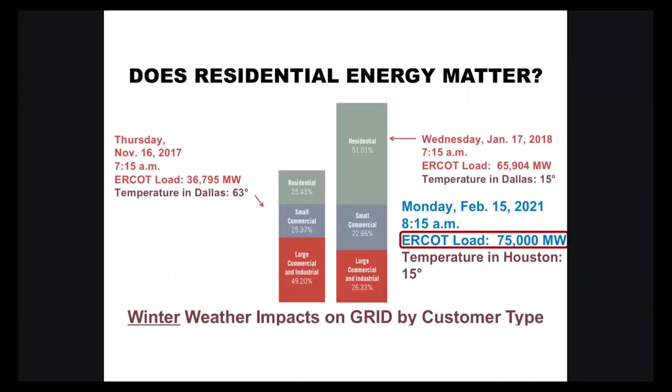And you can see that residential just goes crazy. Everybody's firing up their heater and doing everything they can. Large commercial goes down in percentage, so does small commercial. They go down in the percentage of energy being used, and residential is just completely going haywire. Okay, so that's winter. And then, did I miss summer? What the heck? Okay, well, anyway, summer is very similar.

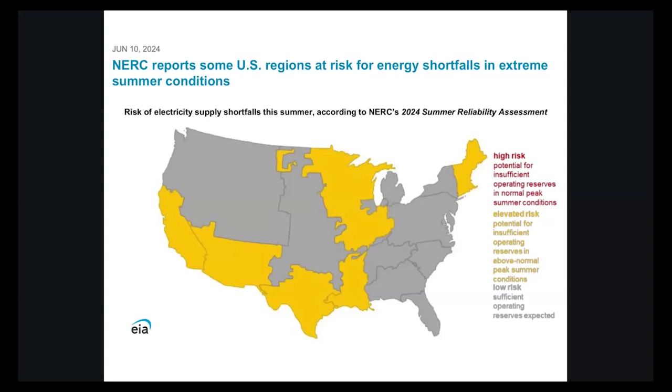So then this is lately, the high risk and elevated risk potential for insufficient operating reserves in above normal peak summer conditions. Okay, and so you can see that we're right in there compared to the rest of the country. Nor are we alone. But we're in elevated risk for this.

And then this was a New York Times article. I loved it, and I've been incorporating it for a while now. This is the 90s and into the 2000s average of days above 100 degrees. Okay, and you can see that Houston is in the gray zone, and we should realize that we had 2011, which is right after this was done.

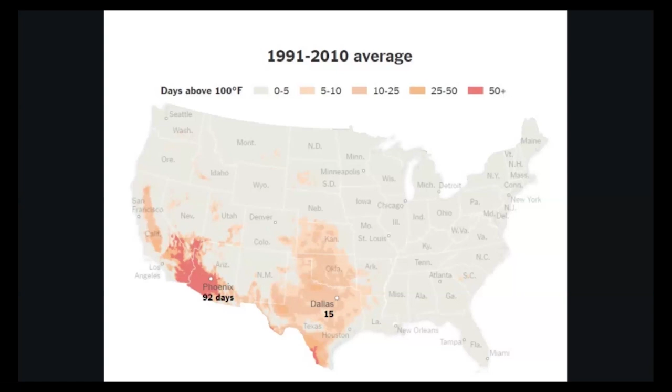All right. So there's all kinds of stuff on the internet. I just found this residential energy consumption survey. So here we are looking at air conditioning expenditures per household. And you can see that the Texas average, top right next to the map, is 460 compared to 299 for the average in the United States. And of course, you've got Alaska contributing to the average in the United States.

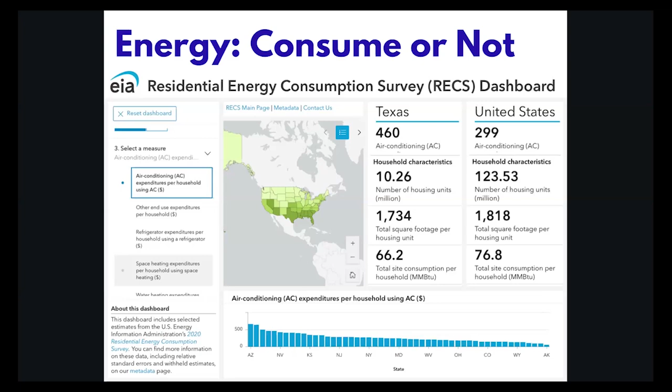So, something, again, we all know, but there's data out there for anybody who wants to pay attention. As far as states, we're third. We have the third highest air conditioning load. We're behind Arizona, right? Okay, so wait a minute, Steve, where's gas?

Well, okay, so we use it for heating, we use it for water heating, we use it for cooking, and it's very cheap. But from a health standpoint, it's leaking into your house. And it's also leaking methane into the atmosphere from wellhead to your appliance. Okay, gas is leaky. Nobody wants to admit it, but it is.

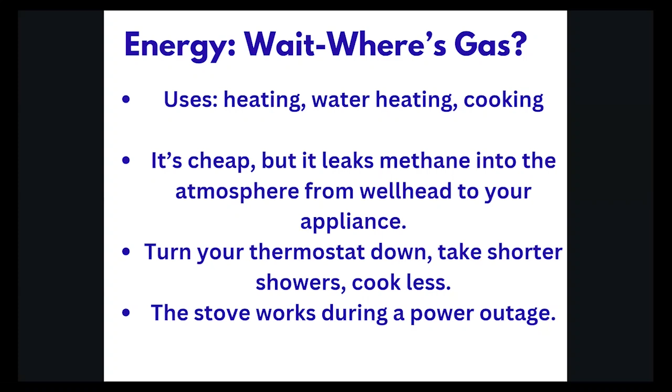So what can you do about gas? Well, you can obviously turn your thermostat down, take shorter showers, or cook less. Now, on the positive side, whenever we have a power outage, the stove works. So hey, it's not all bad. And again, it's real cheap. So there's gas.

All right. So here we are back to looking at energy consumption. This is the average annual electricity consumption by type of home and census region in 2015. Okay. So on the left, the bars are all homes.

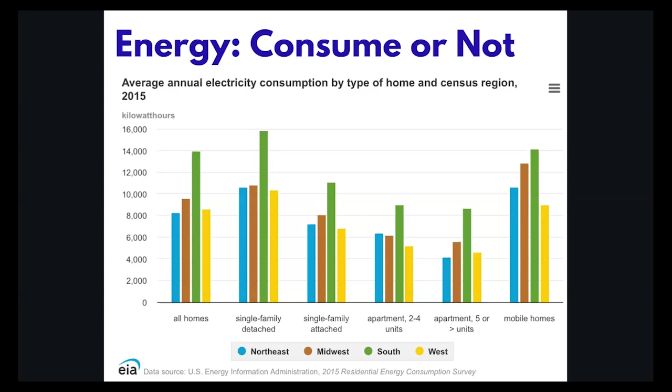Then we have single family detached, single family attached, apartments 2 to 4 units, apartments 5 or more units, and then mobile homes. Okay. Now the green bar is the South, which we're in. So again, it's just backing up that we're using a heck of a lot of electricity. Not so much gas, but we're using a lot of electricity. So there you go. 16,000 kilowatt hours a year in single family detached houses.

All right. So where are we using our energy? This is a great little graph from the EIA. So top of the list is air conditioning. Then we have space heating, which again, this is average across the country. So there isn't that much space heating down here, but there's still space heating. Then there's water heating, which is huge, lighting, which is huge, refrigerators. People don't think about the refrigerators, and maybe some people do, but there's that. Then TVs and related, so they're kind of right up there with refrigerators.

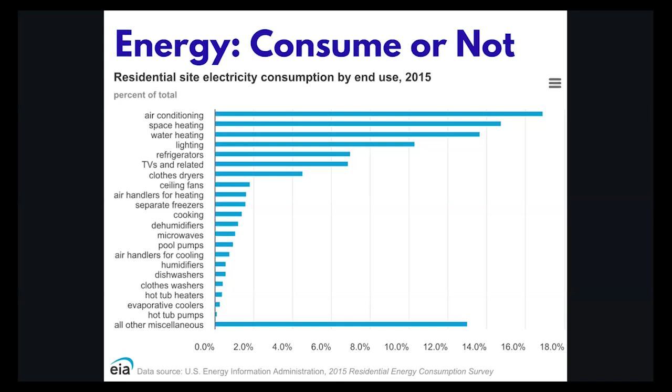Then there's your clothes dryers. Then ceiling fans, which are a very good expenditure of energy. Ceiling fans are fantastic. They can cut down on how much air conditioning you're doing. And then we have air handlers for heating, separate freezers for crying out loud. Just be thinking about that. And then there's cooking, dehumidifiers, microwaves, and it just goes on down. And then unfortunately, there's all the things that they can't really aggregate very well. They throw it into all other miscellaneous, and that adds up. So here we are. Anyway, just factoids, things for people to keep in mind.

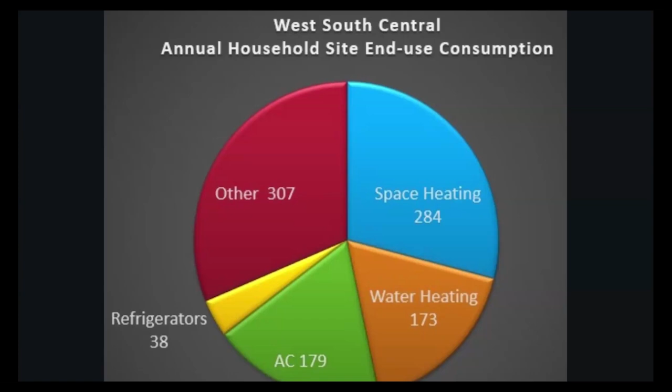All right, so the lesson for today is the DIY home energy audit. This is available still, even though I've retired. My website is still up, and you can download this 4-page guide from codegreenhouston.org. Everybody see this? You can get there. So when you scroll down, you will see the DIY home energy audit, and you click read more, and you can bring it up. So here we are, we're bringing it up.

I gave you 2 big end pieces. Yeah, you had big pieces. Don't need any more. It was so big you had trouble eating it in one bite. You had to bite 2 bites. Okay, it looks like we had a little sausage snack. It's low carbs. Okay, so somebody might need to mute themselves.

At any rate, we're looking at the DIY home energy audit, and one of the most important things is right off the bat, add up all your energy bills for the past year. That's why I put a star there. So how many kilowatt hours did you consume and how many for the highest month? You just need to have that in mind as you're looking around your house or apartment, to see where you are, how much energy you are using. Are you doing it because your energy bills are out of whack, or you just want to use less energy and be a good citizen?

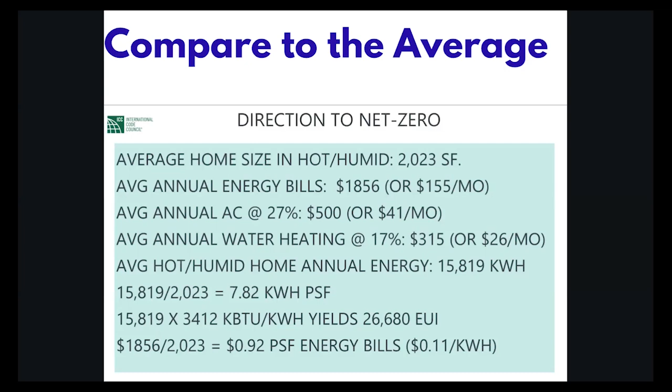So then getting back to the home energy audit, you want to walk around the house and check for air leaks, okay? And here's this really good little checklist with some check boxes, and you can just get your head in the game and walk around your house and look at that. Then check to see if you got weather stripping. That's very important because you get a lot of air leakage around doors and windows.

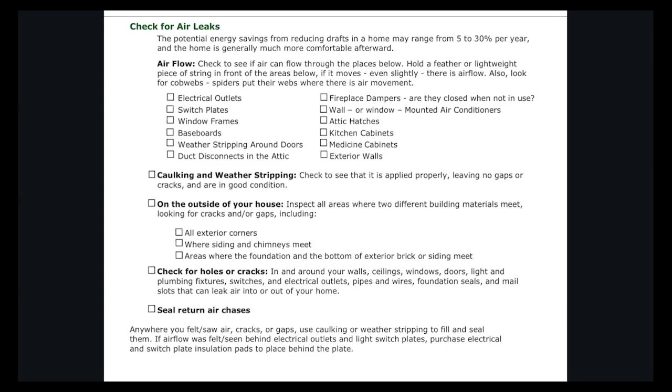Then go on the outside of your house and look for areas where two different building materials meet, looking for cracks and gaps. And then check for any holes. You know, you never know. There could be leaks around a faucet or leaks around an electrical outlet or something like that. So just look around the outside of your house as well.

Then we want to talk about insulation a little bit. Is there any way that you can figure out what kind of insulation you have in your house or your apartment or what have you? You may not be able to. Do you have a hatch or ladder to go up into your attic? Okay, if it's in the conditioned space, is that a big hole in your insulation? So that is a huge problem if you're not thinking about that, okay?

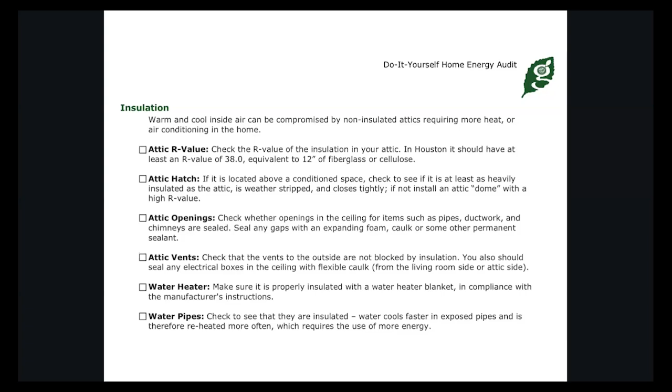So any kind of attic openings you want to take a look at, attic vents, you want to make sure that the vents to the outside are not blocked, and all kinds of interesting things. You can look for your water heater. Perhaps you could put some insulation around your water heater. And then water pipes, are they insulated? That could also help during a freeze if they're insulated. So be looking for insulation.

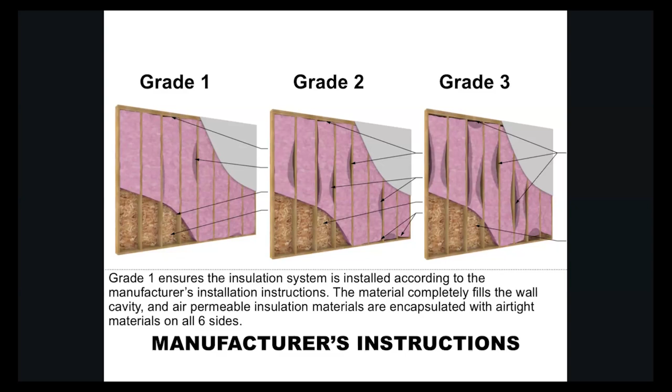This was a slide that's probably the best slide I ever had during my entire career with the city because I presented it to the inspectors and it kind of gave them a new realization of what they ought to look for before things get covered up. So these are the various levels of installation for insulation, okay? Grade 1 is very good. Grade 2, there's gaps, and grade 3, there's a lot of gaps, okay?

So this is what's interesting about it, especially in your attic where you need a high value of insulation. So if you have an R30, let's say, code minimum now is R38, but let's just say an R30 with no gaps equals R30, and with 4% gaps, it equals R13. R13 is like 4-inch insulation in your walls. That is awful.

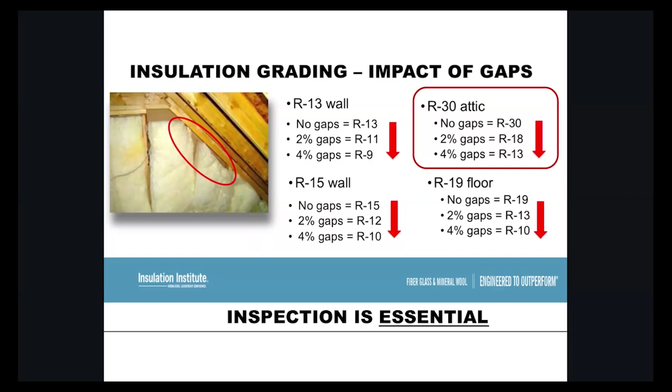So inspection of any insulation, if you're going to do any remodeling and you're going to do any insulation, you want it to be installed properly, okay? Because if it's installed improperly, it's getting itself worked down to worthless, and that's not what you want.

All right, back to the home energy audit. You want to look to electronics and appliances. Are there any that are burning electricity when they're turned off? You look into that. Are your electronics and appliances more efficient? Like, are they Energy Star rated? Your refrigerator, if it's really old, it could be using a heck of a lot more energy than you'd like. So these are all just thoughts. They're not like, hey, go do this. That's why you want to do an audit and then prioritize and do what you're able to do.

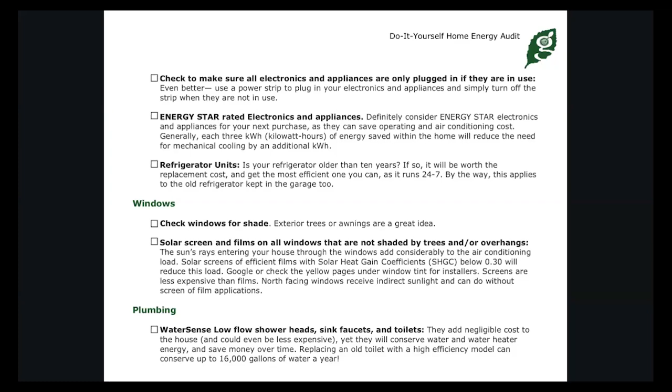So windows, putting solar films on your windows is an incredibly effective mechanism in this climate because there's a lot of radiant energy getting in through your windows. Just to be aware of. Plumbing, if you can use less water, you're burning energy to heat your water. So if you can use less hot water, okay. And then of course, everyone wants to use less water, but it's hot water that's the big one. So then finally, the last page is the energy saving tips. Let's take a look at those.

Whenever you can, use task lighting instead of lighting the whole room. That's a good idea. Turn your lights off when you're not in the room. All these things that you already know. Okay. Turn off the TV when no one is watching it. So, there you go. It's a nice list of things that you can do if you feel like it.

Okay. And they're legitimate suggestions. Each one is not going to just fry your brain and, wow, that was it. Okay, man, I'm using a lot less energy. It's like, how many of these can you deploy? So that's kind of the question here. All right. Then,

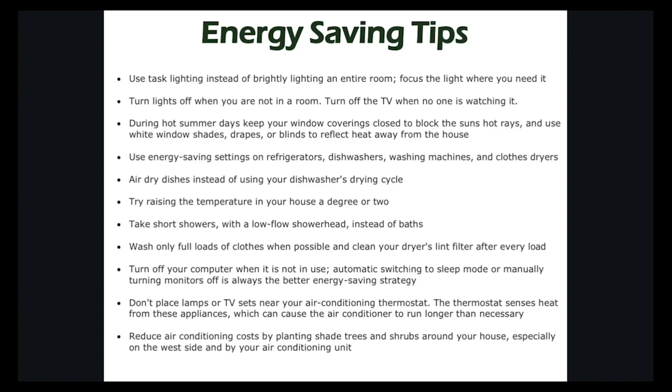let's take a look at, and then here's right before we get to the pie chart, ceiling fans. There's the spiel on how much more comfortable you can be with a low consuming device. Ceiling fans are not much more energy use than a light bulb. Okay. So, that's the way to go instead of turning your air conditioning thermostat down.

All right. So anyway, just so you know, these pies show you, since AC is a huge usage of your energy bills, your walls are not your big thing. It's really the attic. And notice how big your windows are. And then there's leaky infiltration, which there was practically a whole page on walking around to check for air leaks. And then there's your appliances.

Now, some of these appliance usage, there's nothing you can do. You aren't going to be turning your refrigerator off for a couple hours a day. That's insane. So there's a certain amount of sunk costs or sunk energy usage in your appliances, but some appliances use much more energy than others. And some use energy when they're turned off. So look into that phantom load kind of thing.

So the most control you really have is your attic and your windows. Well, infiltration too. Like, let's be looking at weather stripping. Okay. So those three, the green, the red, and the dark blue, are the big ones. That's what you want to prioritize looking into.

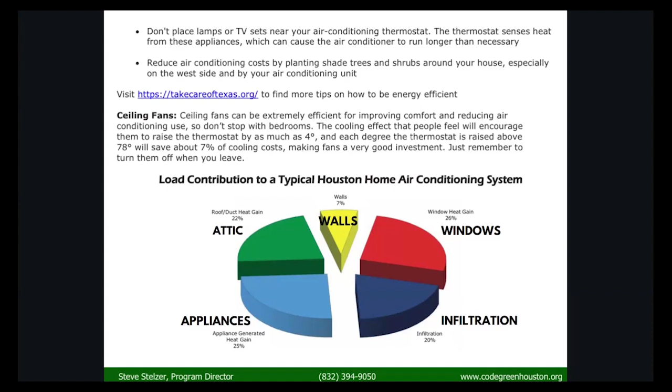Okay. So meanwhile, just so you know, air conditioning, here's another one of those slides that show how much air conditioning is being used in the various climate regions. So ours, we're using the most. We're using even more overall expenditures than Arizona, believe it or not.

I just went to Arizona, got a grandchild in Arizona, and wow, it's nice compared to here, even though it gets super hot.

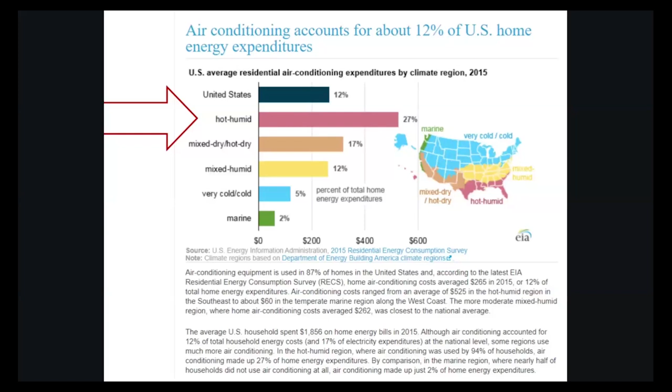So here's the various states of air conditioning, square foot per ton of air conditioning, okay? Texas is the second worst, right? The worst happens to be Pennsylvania. Don't ask me why. It's ridiculous up there.

But Texas uses the most tonnage, or least square foot per ton. Square foot of house per ton of air conditioning is a good rule of thumb to see how efficient your house is. So, you know, look at Georgia, my gosh, and when you have that much more square footage to be cooled off by the same size air conditioning unit, that is really good and saving you money. So you might want to look into that square footage per ton at your house.

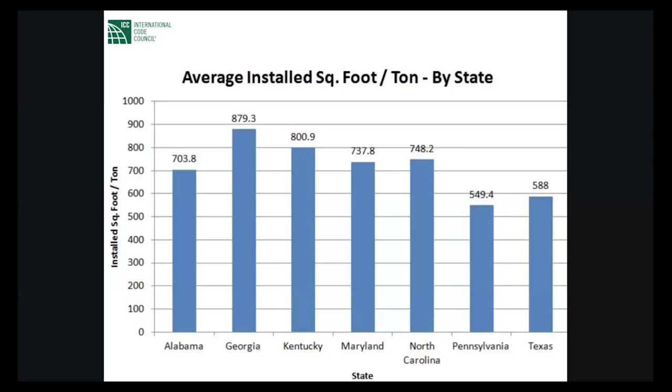All right, so keep in mind, factoid, the larger the AC unit, the more it costs and the more it costs to run. That is a fact. You can, you know, delude yourself about, oh, I really love my size of unit. The bigger the unit, the more it costs and the more it costs to run. The smaller units cost less to buy and they cost less to run. Fact, just keep that in mind.

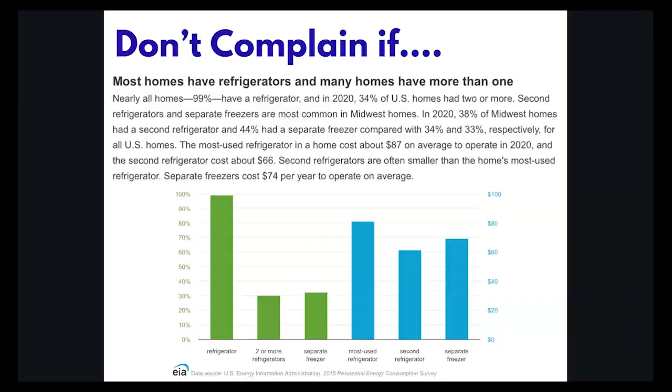All right, so meanwhile, here's a couple of things, like, you know, don't complain if you got a second refrigerator, a separate freezer, and you're burning more energy. Hey, do you really need that? Just be looking at that. All right, so is everything clear so far? It's not one thing.

So then this is just kind of extra, above and beyond. This is what architects use to determine if their design, the house, is going to meet the energy code. Okay, so this is kind of interesting, and I think you would like this, even though you're not an architect and may be scrambling to understand this. But basically, I've circled the ceiling, and notice the architect put in the square footage.

Then we have the walls, typical wood frame, okay? And you put in your insulation R value. And then there's the floor. This one's a typical slab on grade, and you're gonna have no insulation. And so what it's adding up is UA. See the column that says UA. So when you get done, you're going to be looking at that. Not that you have to internalize it, but I'm just telling you how the program works.

So your typical basic code minimum: R38 in the attic, R13 in the walls, on a slab, with the windows with a solar heat gain coefficient of 0.25, okay? That gives you 0.8% better than code, okay? 0.8%, so that's like code, all right?

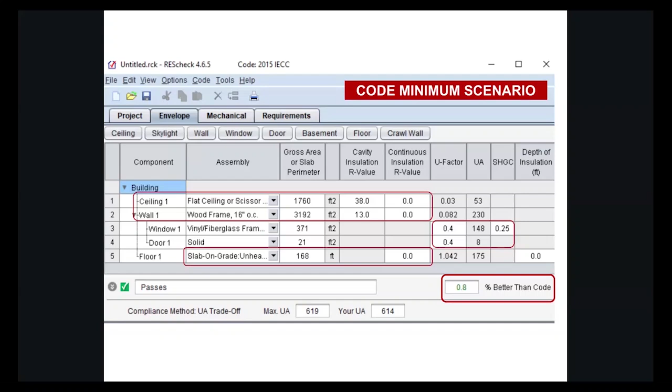There you go. Down at the bottom, you can see the maximum UA, and that's what the program is adding up. That's how it compares it to the code. So the maximum UA is the code. Your UA from what you put in is 614, and that's how it comes up with 0.8% better than code. More than you ever want to know, but you're gonna love how this continues.

So now we've gone to a pier and beam. Okay, we don't have a slab. So that means you've got some cavity insulation in your floor, okay? Same thing, everything else is the same. Ceiling, walls, windows, same size house. We've just put it up on pier and beam. Notice now it's 6.3% better than code. So we had a 5.5% improvement.

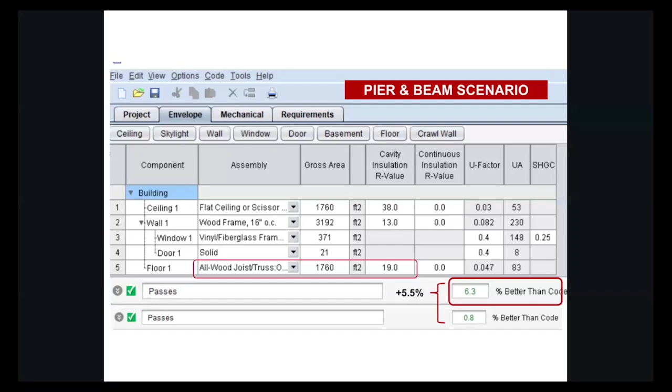Okay, now let's go to better windows. We went from a 0.25 solar heat gain coefficient to a 0.21 solar heat gain coefficient. It went up by another 5.2%. Now we're at 11.5% better than code.

Okay. Now, next one, let's go to continuous insulation on your walls. This is where you would put like a foam board all the way around your house before you put the siding on, before you put the brick on. So you've got cavity insulation. We went up to 15 instead of 13. And we put a continuous foam board around at 3.2 R value. Now we just went up 11% from where we were, and we're up to 22% better than code.

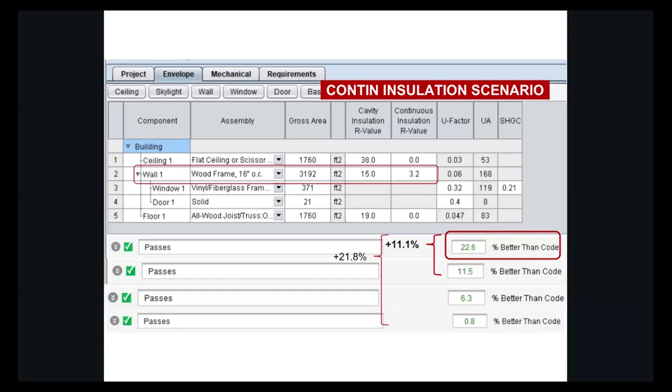So what is this doing? This is keeping your air conditioning in and the heat out. And that's kind of the name of this game. And this is what you want when you buy a house, or if you're going to revisit or remodel your house or something like that. You want to always be looking at the envelope. The envelope separates you from the outside.

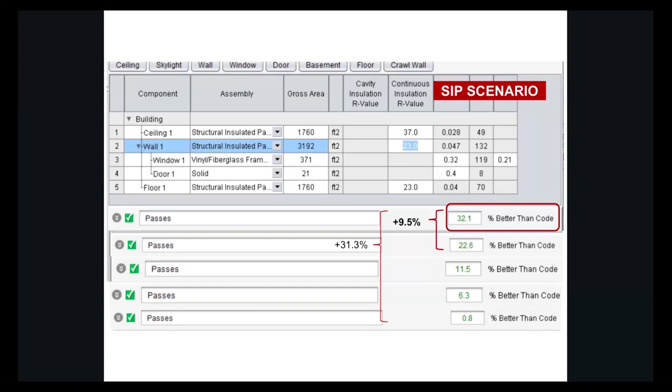Okay. All right. Now we have a structural insulated panel scenario. You would probably never do this. It's advanced enclosure technology, but this was for architects, so I wanted them to know how much better things could get. So that's another 9.5% better than what we just looked at, and we're up to 32.1% better than code minimum. Okay, so this gives you a feel for, yes, there are things you can do, especially if you're building from scratch. And this wasn't even including equipment stuff.

So what do I do at my house or my apartment, and what is a good upgrade? Okay, so 1, do the audit. 2, attic insulation is huge. 3, weather stripping is huge. Remember that pie chart? Okay, window film is huge. Then it comes down to your air conditioning system. Change AC or a duct replacement, and you would want to do a Manual J and a Manual S investigation to right size your AC unit and to right size your duct work. And then finally take a look at your water heater and your refrigerator.

But it's insane to replace your AC units with no attic insulation. I mean, that's insane. So that's why it's down there at number 5. You want to take care of your envelope and then change out your AC, not the other way around.